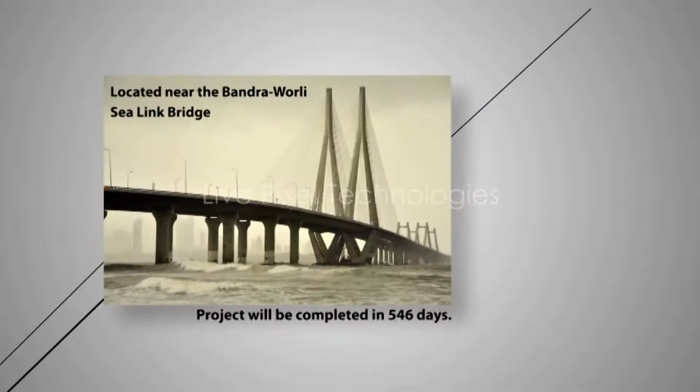The passenger water transport terminal will be located near the Bandra-Worli Sea Link Bridge, and the project would be completed in 546 days. The broad scope of work would include piling operations to lay foundation for the jetty and terminal building of Bandra Port, and carrying out dredging works around the proposed site.

Work would also include strengthening and extension of the existing breakwater, construction of a state-of-the-art terminal building and parking spaces outside the building, creating approach roads around the proposed site to allow swift access to the new port, and construction of link span and floating pontoons for up to 6 catamaran boats and a hovercraft port.

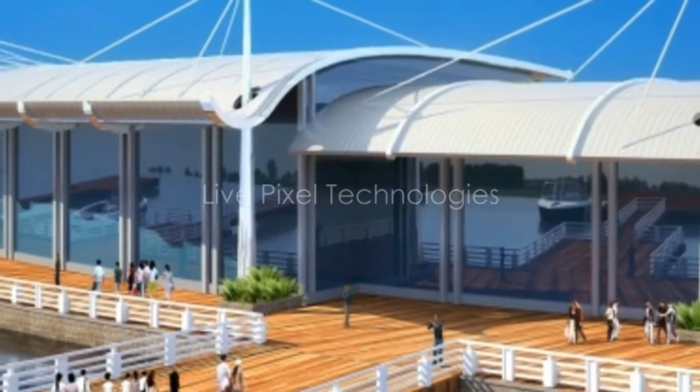Many of these activities would be carried out simultaneously by the joint venture so that the project is completed well in time and handed over to the MSRDC. Once complete, the Bandra port is estimated to serve 2 lakh commuters, handling 500 ferries daily, thereby forming a key solution in resolving the traffic woes of Amchi Mumbai.

Let us now understand how Supreme DBM would turn this exciting new port into a reality. Survey and mobilization: as a first step, the Supreme DBM joint venture would do extensive survey of the proposed site, researching and collecting data, performing geotechnical investigation of soil, and making amendments in the design based on analysis of the data collected.

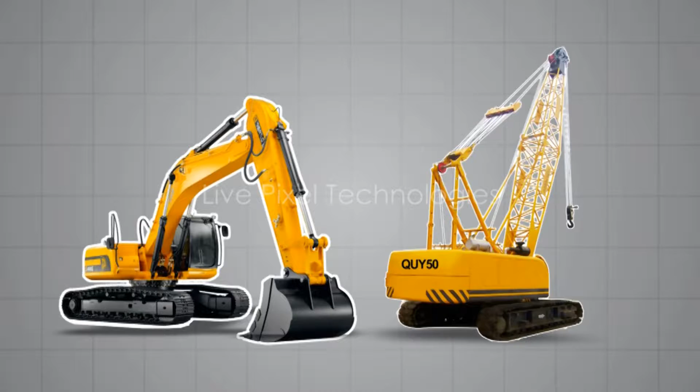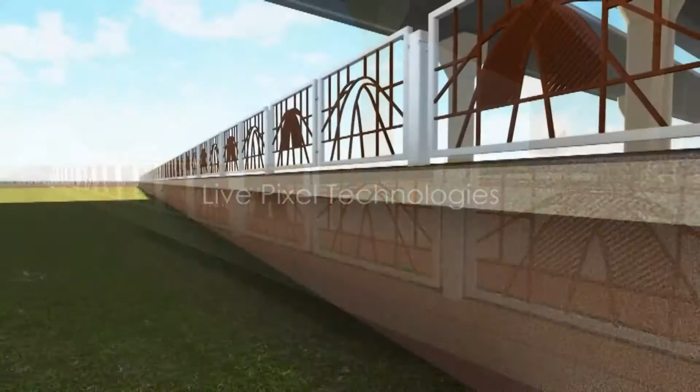These extensive surveys would allow us to mobilize the right kind of materials, equipment, and personnel to carry out the construction activities. Simultaneously, a project wall would be constructed around the periphery of the project to secure the proposed site.

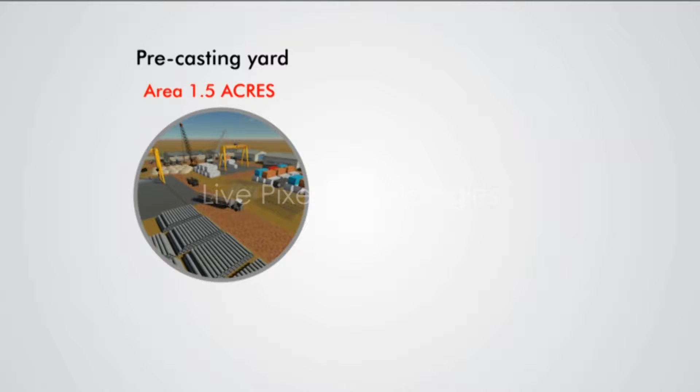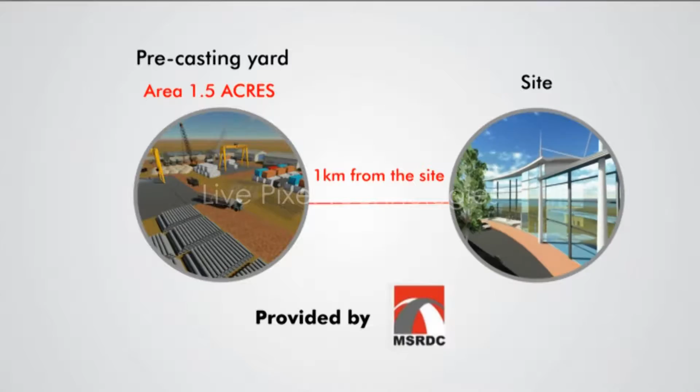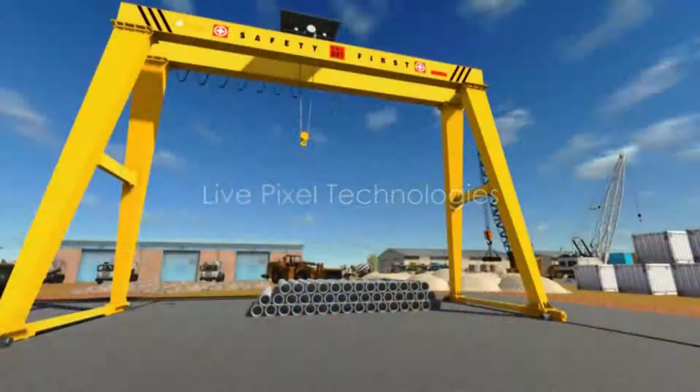Precasting yard: for the storage of construction material and carrying out precasting jobs, an area of around 1.5 acres, within 1 kilometer of the site, will need to be provided by MSRDC. This space will be used as storage and laydown area for casting of the blocks, stocking of supplies, stacking of pipes, and setting up a construction site office.

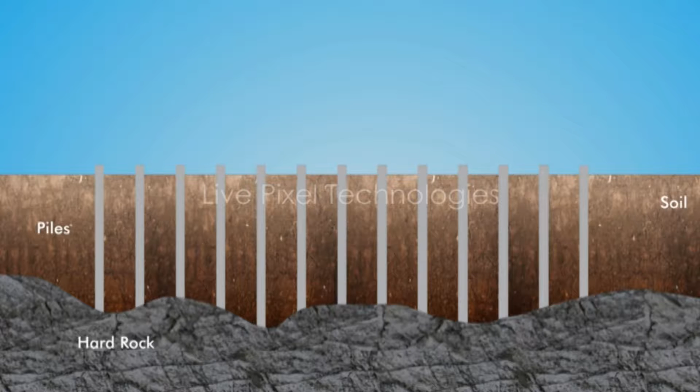Piling: piling is the process of driving steel or concrete piles into the ground to transfer the load of a building or structure to deeper soil or rock of high bearing capacity, thereby providing support to a structure. Piling would form a crucial step in the construction of the Bandra port.

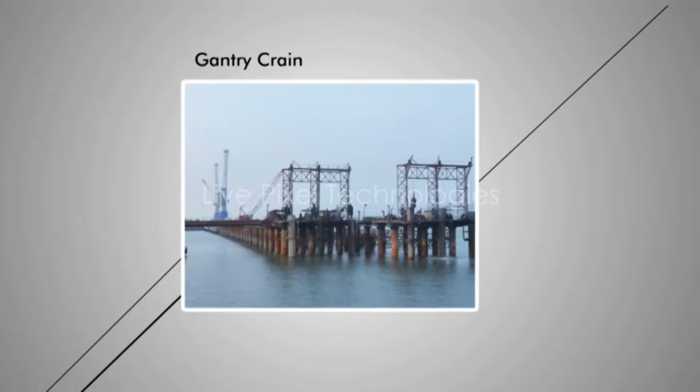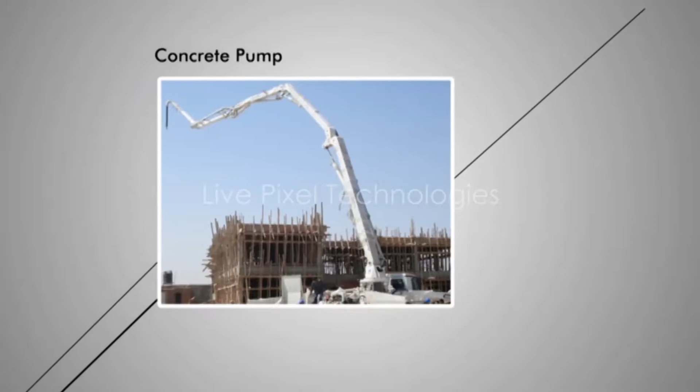The process would commence from the 4th month onwards. Various equipment such as gantries with 4 winches, crane barges, vibro hammers, diesel winches, tugboats, and concrete pumps, among others, would be deployed for laying the pile foundation.

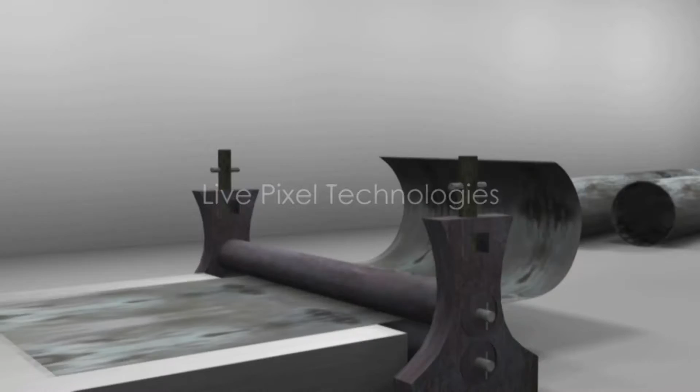Piles would be fabricated on site and transported to the gantry using cranes. Temporary piles will be driven at the appropriate location using vibro hammer to support erection of piling gantries.

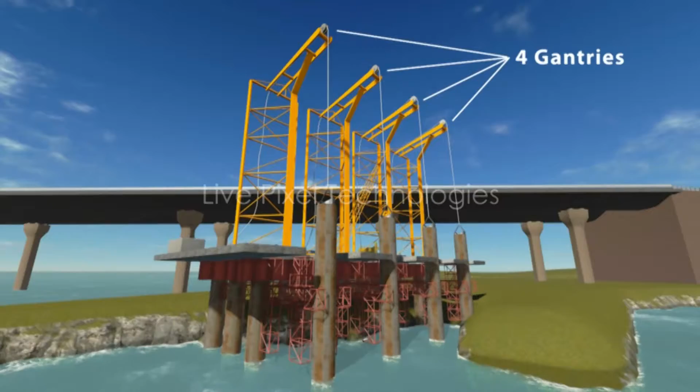4 such piling gantries with 4 winches each will be erected to allow piling to be carried out at multiple locations. Once a set of piles are driven, the gantry would move forward to place the next set of piles into the ground.

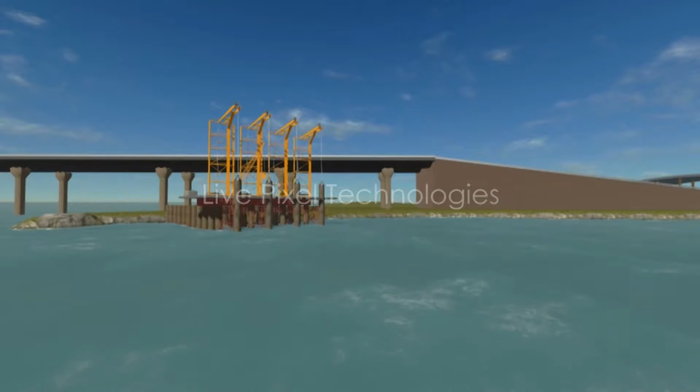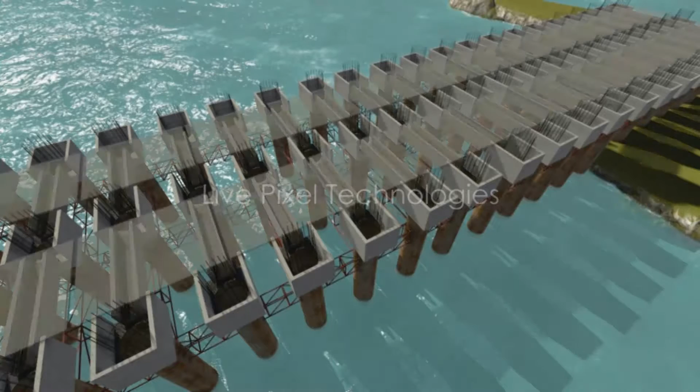The piles would then be chipped and fixed with pile caps. Pile caps would be connected together using beams, forming a mesh of concrete and steel. Concrete pumps would carry out in-situ concreting, and then the deck slab would be laid on the pile foundation.

The piling gantries would move from west to east and thus lay the foundation for constructing the jetty and the terminal building. The entire piling work is slated for completion in 314 days, and the process would overlap with other activities such as dredging and breakwater construction.

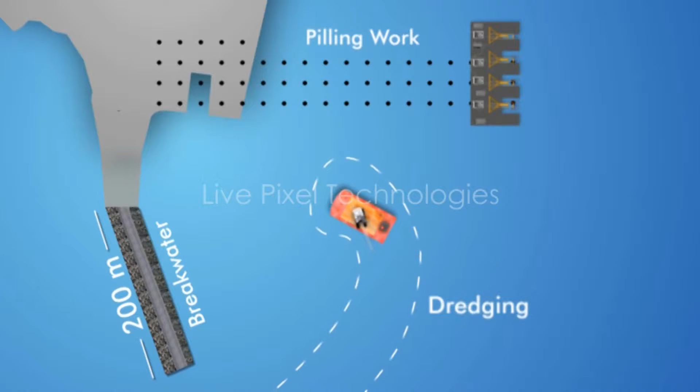Dredging: the site of the Bandra port is surrounded by shallow waters which can hinder the movement of larger boats during low tides. Hence, the seabed around the port would need to be excavated to deepen the harbour by up to 12 feet. This underwater excavation is called dredging.

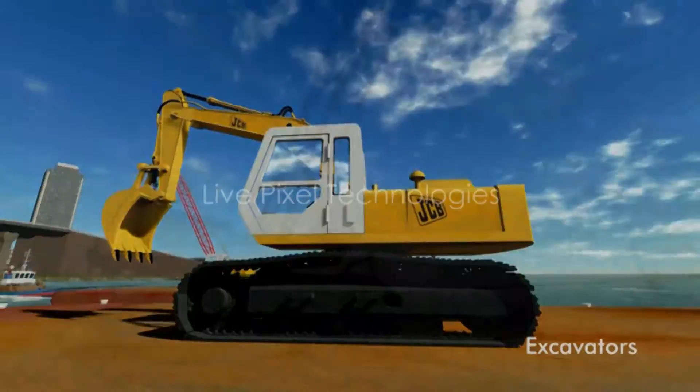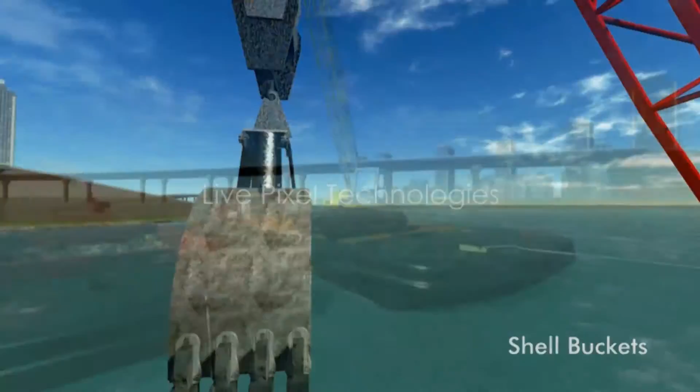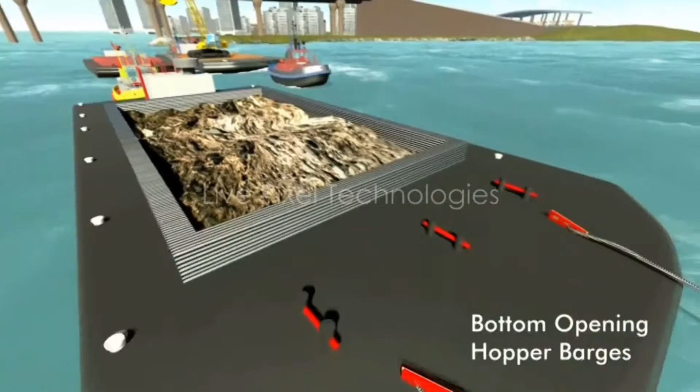We would carry out the dredging operations using excavators and grab dredgers, which have clamshell buckets attached to a crane mounted on spud barges. These dredgers would excavate the bay mud and load it on bottom opening hopper barges, BOHB. Once filled, these hopper barges would be towed away to the disposal location by tugboats.

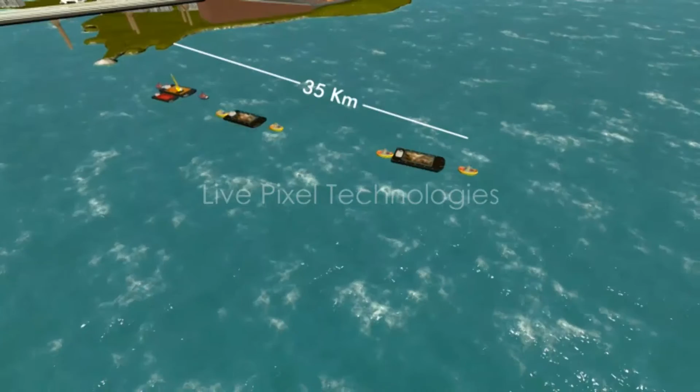This disposal location would be at least 35 kilometers from the proposed terminal. On reaching the disposal location, the bottom of the hopper barges would be opened to dispose of the dredging material.

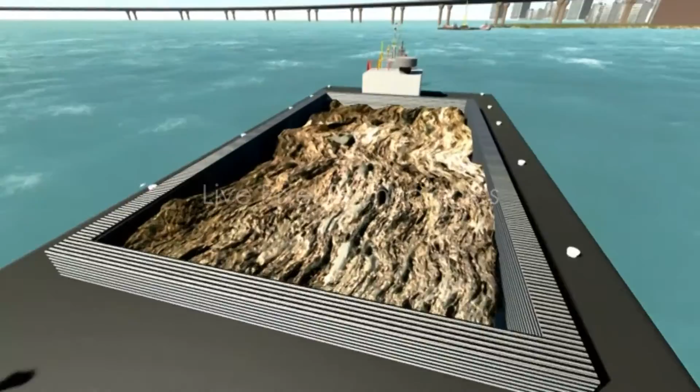Multiple hopper barges would be deployed to carry out round-the-clock disposal of dredged materials, and the entire dredging operation would be completed in 300 days.

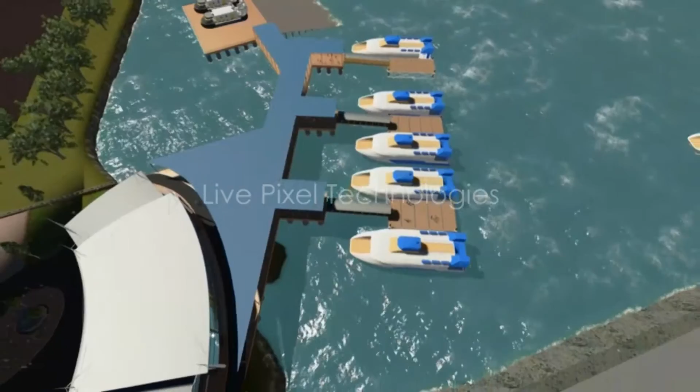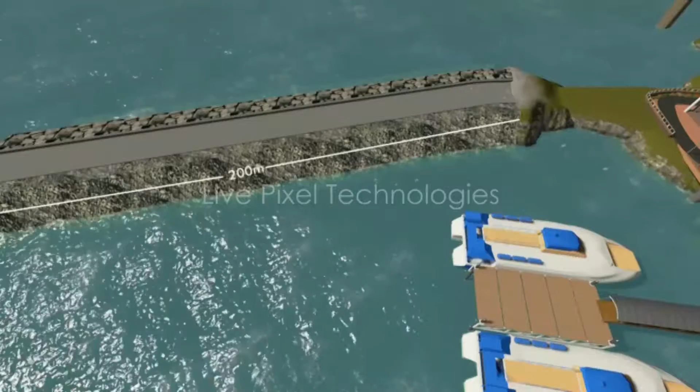Breakwater. The Arabian Sea can get quite rough at times, causing damage to unsecured property on the seafront. Hence, in order to protect the new Bandra port and the anchored catamarans from the pounding of the waves, an underwater seawall or breakwater would be constructed, which would absorb most of the waves' force. The proposed breakwater would be 200 meters long and created by extending the existing breakwater built for Bandra-Worli Sea Link.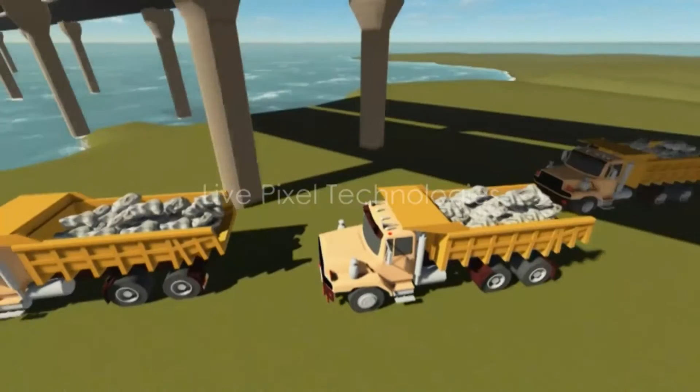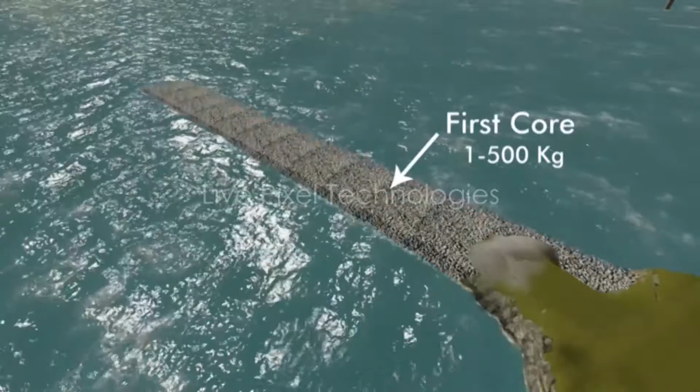Based on the hydrographic survey of the seabed and the waves carried out in the beginning, rocks of various weights and size would be acquired from nearby quarries and shipped to the site either by land or by sea for constructing the breakwater. First, the core of the breakwater would be laid by dumping smaller stones, 1 to 500 kilos, using bottom opening hopper barges, BOHB, forming a heap structure.

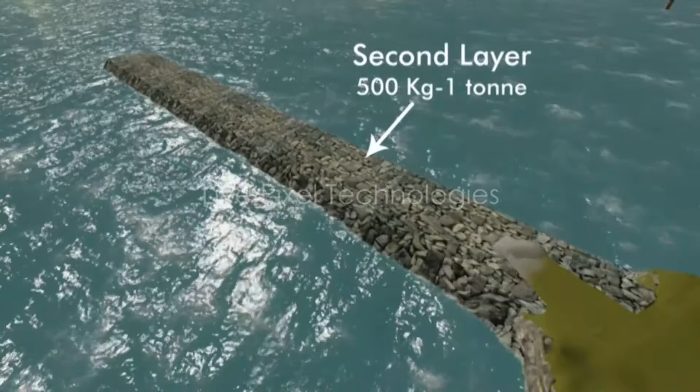The core would be surrounded by an underlayer consisting of larger stones, 500 kgs to 1 ton, to protect the core. The underlayer would be further protected by the main armor, which would be made up of even bigger stones, 1 to 3 ton. The armor layer would act as the primary speed breaker for the oncoming waves and absorb most of their energy. Under the guidance of divers, each stone would be placed through cranes one by one in a sequence to ensure interlocking.

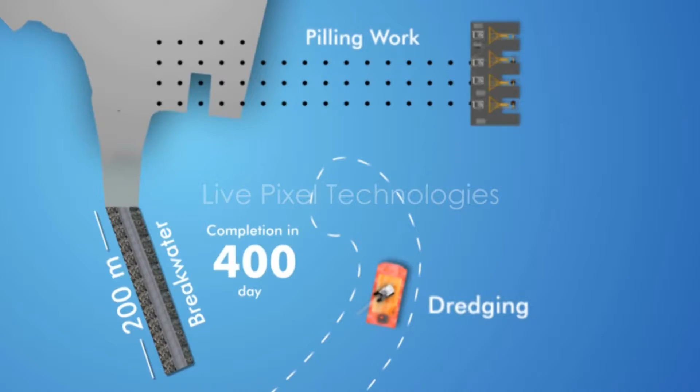The 200-meter breakwater would be completed in 400 days and thus protect the Bandra port from the gruesome force of Mother Nature and provide tranquil waters around the jetty area.

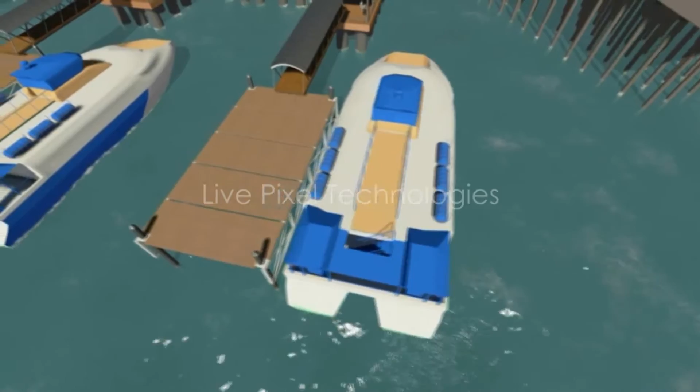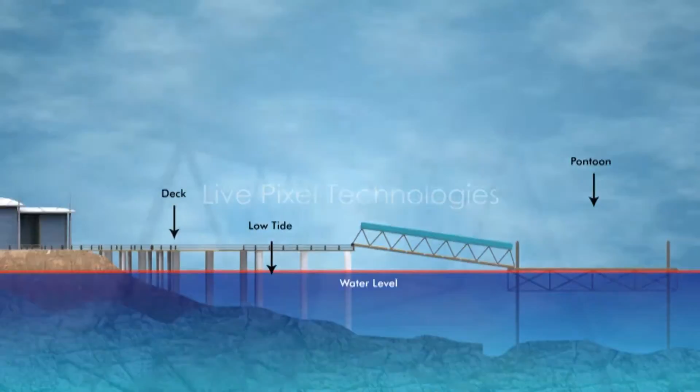Pontoon and link span. After the construction of the deck is complete, ramps that serve as docking points for the ferries would be provided. For this purpose, 6 pontoons would be placed next to the deck. These floating pontoons would allow passengers to get on and off the ferries. Each pontoon would be connected to the deck by link spans or drawbridges, which would tilt up or down depending on the level of the floating pontoons. The pontoon and link span fabrication and installation would be completed in 300 days.

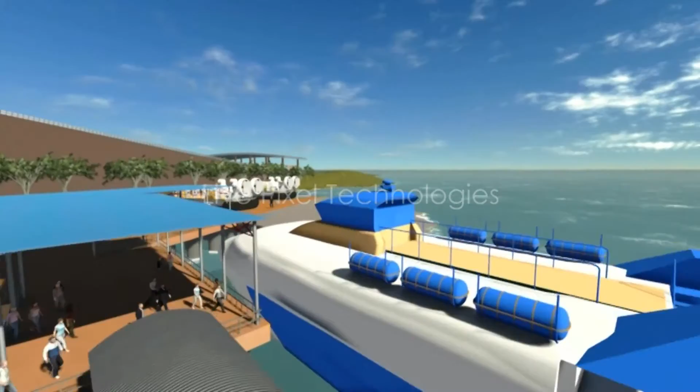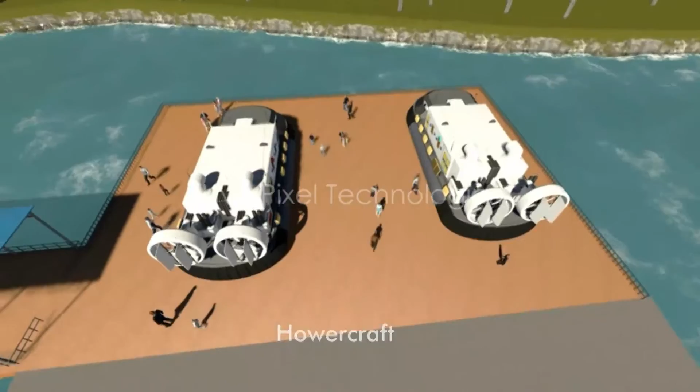Hoverport. Besides the docking area for catamarans, the Bandra port would also have a hoverport terminal for landing of 2 hovercrafts at a time. The hoverport deck construction would involve reinforcement binding and concreting, which would be completed in 125 days.

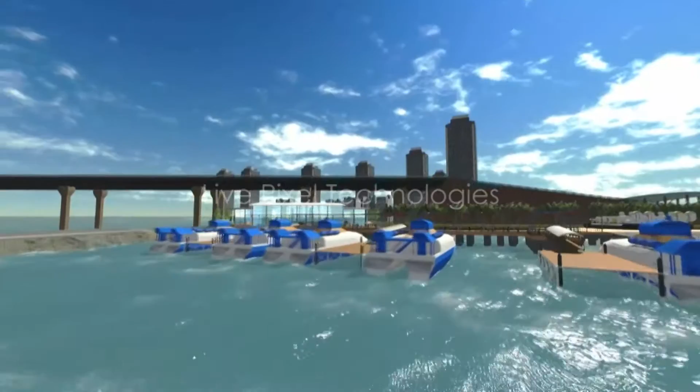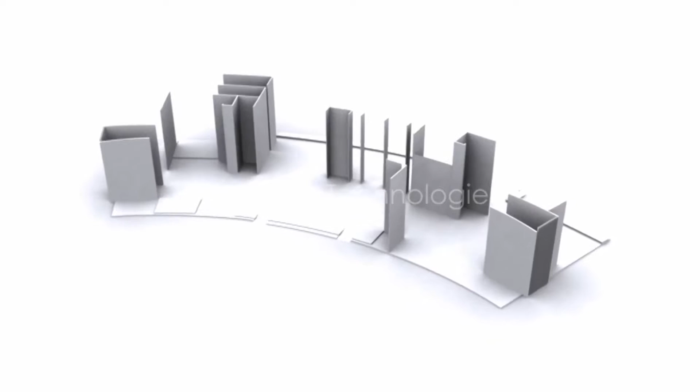Terminal building. The terminal building at the Bandra port would be located on the reclaimed land, and its construction would begin once the land piling work by Gantry 3 gets completed in the first 4 months of the project. The terminal building would be a 2-storied steel frame structure with reinforced concrete panels. After the RC foundation work is laid, the building structure would come up using reinforced steel and concrete, and external walls will be constructed with the associated beams and slabs.

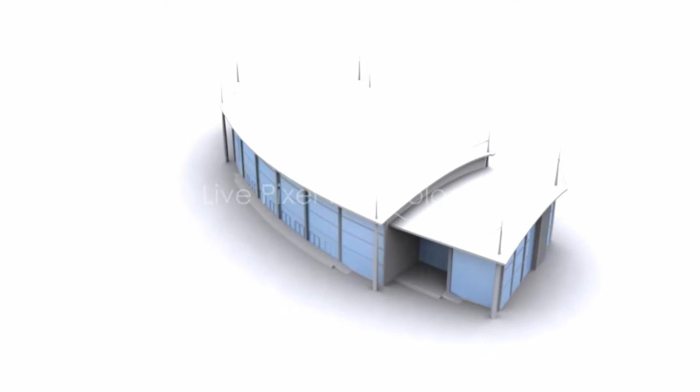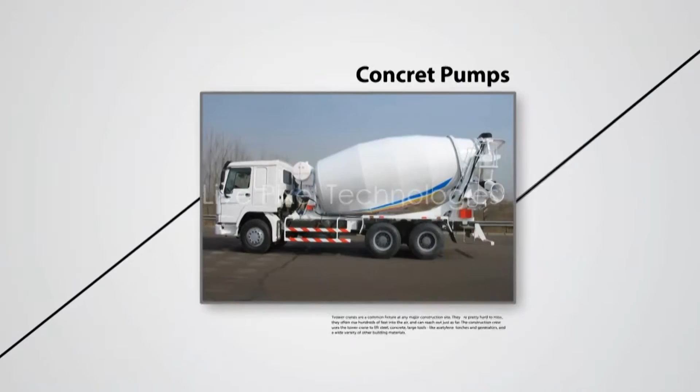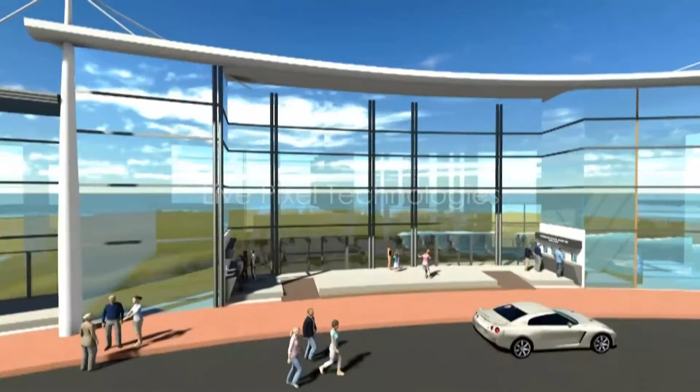Equipment such as tower cranes and mobile cranes would be deployed for the construction of the building, and concreting work would be carried out by concrete pumps. Anti-termite treatment would be carried out in the entire terminal in accordance with the best practices and specifications. To give the terminal an ultra-modern look, structural glazing would be done along the whole perimeter of the building. Inside the building, 4 ticket counters would be provided along with the necessary IT systems.

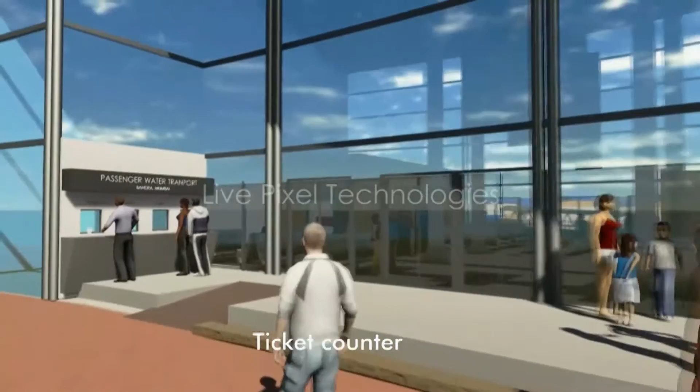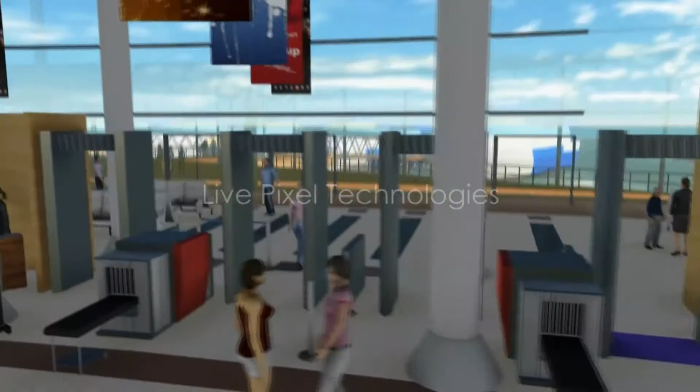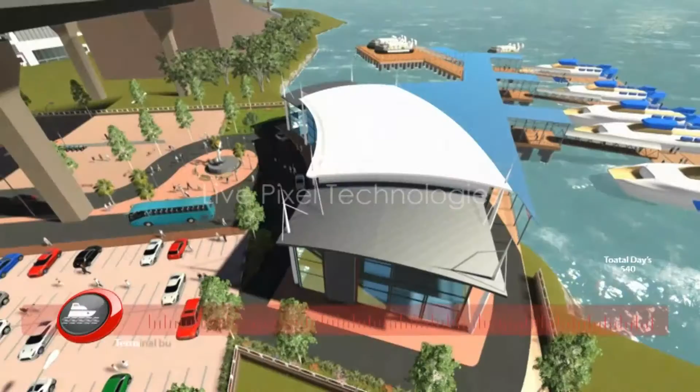Supreme DBM Combined would also undertake construction of basic amenities within the building, including electrical fittings, concealed plumbing and drainage system, firefighting system, vitrified flooring, heating, ventilation and air conditioning HVAC system. The terminal building construction would commence from the 4th month and the building would be ready in 420 days.

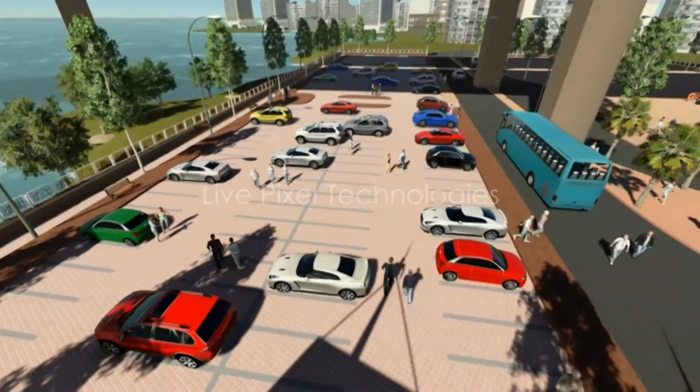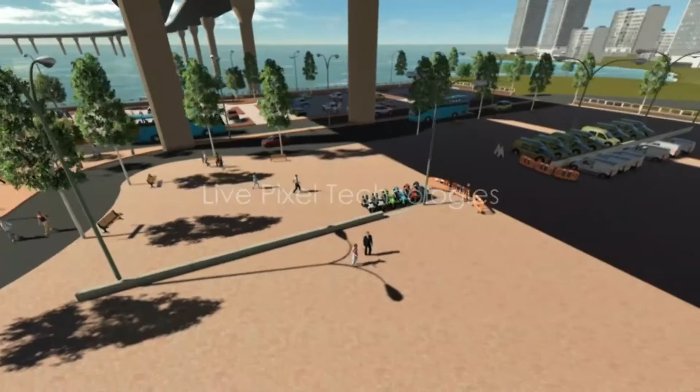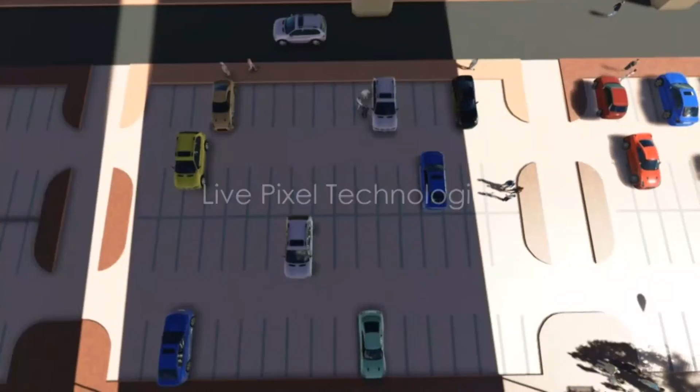Parking and road. Outside the terminal building, a 5,000 square foot parking area would be provided with parking space for up to 100 vehicles. What is the use of a port if it is not easily reachable? Hence, to allow easy access to the Bandra port, we would construct a 16 feet wide concrete road stretching between point A and the terminal building.

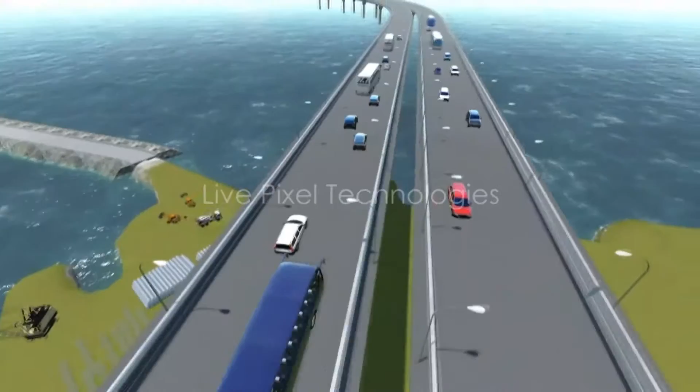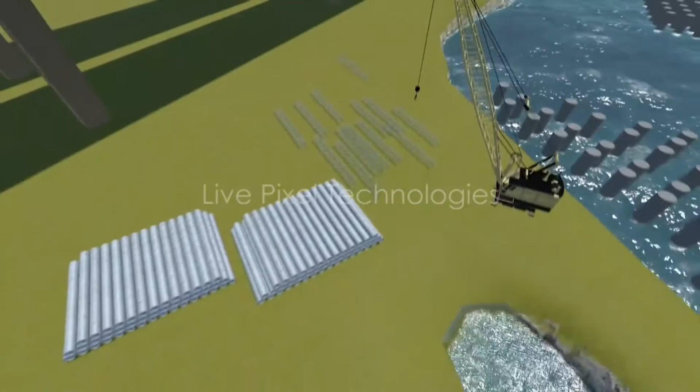Traffic diversion. The location of the project site is below the Bandra-Worli Sea Link, and as such, the construction work would not interfere with the traffic movement in the region. Additionally, we plan to carry out the transportation of materials in a manner that minimizes public inconvenience by efficient scheduling of truck deliveries during non-peak hours or night time whenever possible.

Navigation aids. Once the terminal building and the jetty construction is completed, navigation aids such as channel markers, signaling systems and control room would be provided to ensure precise movement of ferries around the Bandra port.

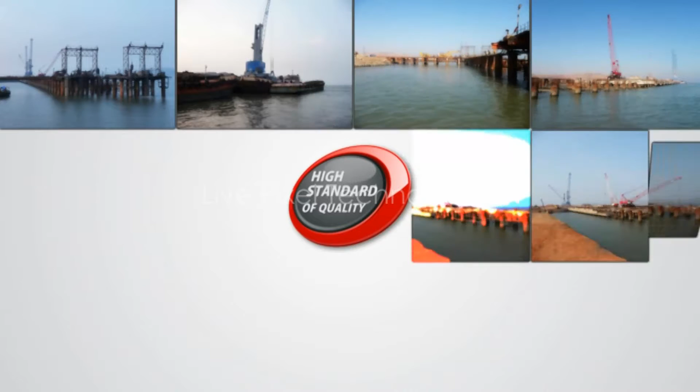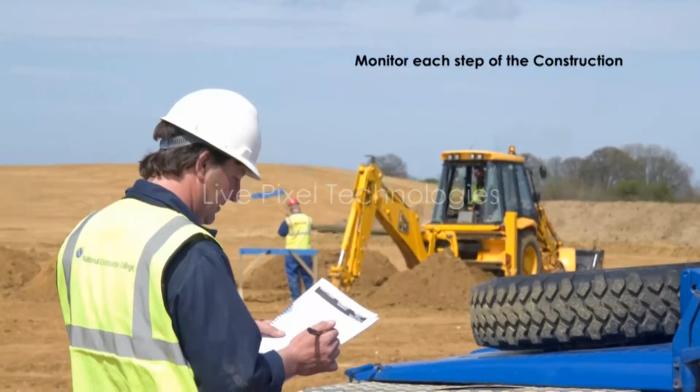Word on safety and quality assurance. We at Supreme DBM have always been committed towards maintaining high standards of quality in our past projects and would put in place rigorous quality assurance checks during the construction of the Bandra port. Highly qualified QA teams would monitor each step of the construction, ensuring quality of the highest standards.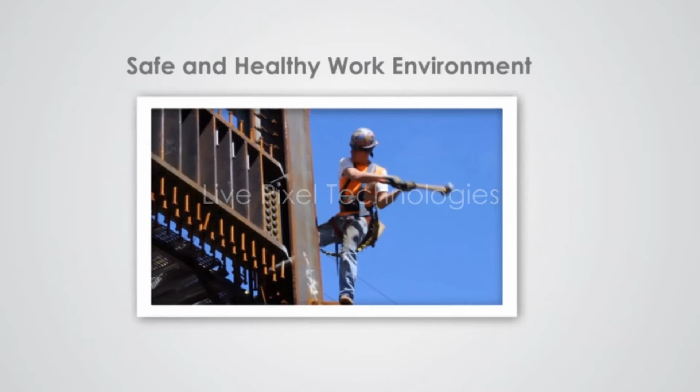Just like quality, following strict safety measures has been our hallmark, and we are proud to say that our past projects have witnessed zero fatalities. We would continue to provide a safe and healthy work environment to our workforce by eliminating or minimizing the hazards that can cause accidents and injuries.

Testing and handover. After all the construction activities are completed, the Supreme DBM joint venture would perform thorough testing of all the facilities at the Bandra port before finally handing over the project to MSRDC. The Bandra port construction would require meticulous planning and precise execution, and with our experience and zeal to excel, we are confident in making it a grand success.

The completed Bandra port would form a vital part of connecting our island city through sea, thereby making commuting easier for lakhs of Mumbaikars. And we at Supreme and DBM are honored to be a part of this ambitious endeavor that would transform Amchi Mumbai into a well-connected city of the future.